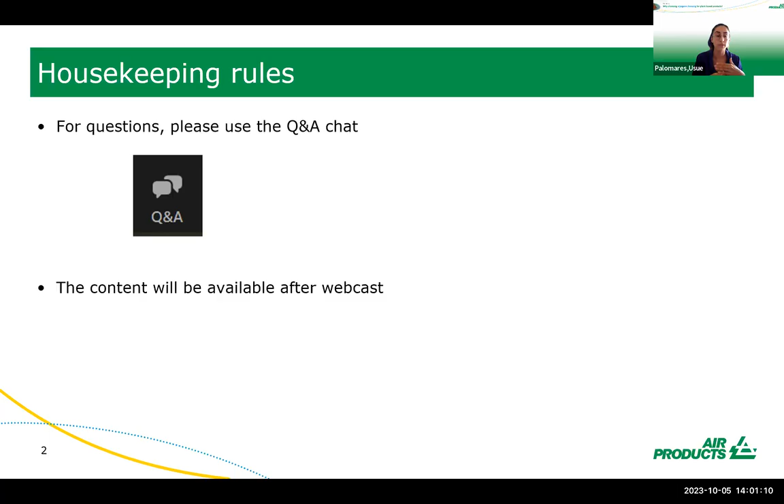In today's webinar, Ann Callens, Food Segment Manager of Air Products Europe, and Jon Trembley, Technology Manager Cryogenic Applications at Air Products Europe, will present the plant-based event.

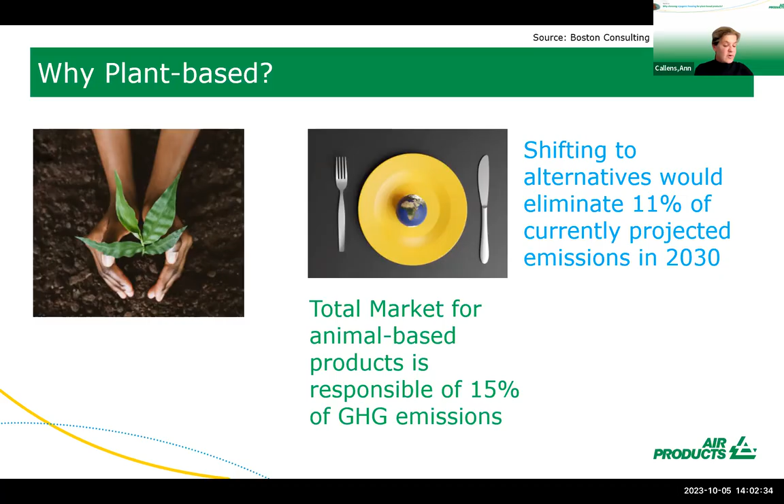So let's take a step back and ask ourselves the question, why is the market shifting to plant-based products? And the answer is very simple. What we eat has become critical in how we combat the climate crisis today. So on what we eat, we see that consumers are on board and they want healthier foods, for themselves and for the planet.

More than 30% of consumers would fully shift their diets to alternative proteins if doing so would have a major positive impact on climate. But there are still certain barriers for manufacturers to tackle. Four of these barriers are listed here on the slide. It's really offering plant-based products with taste and texture that satisfies the consumers.

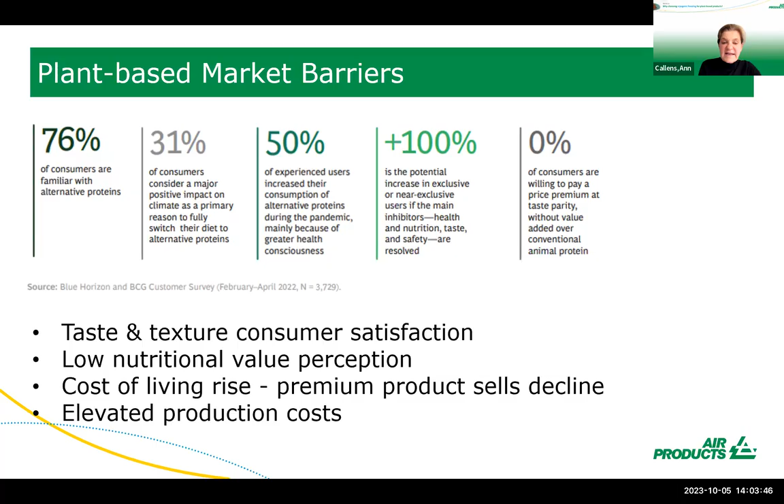Plant-based protein products sometimes still have a low nutritional value perception. How to tackle this? And then there is the cost of living rise, premium products. And yeah, they are expensive. And we see that some of these product sales decline in the market. And then there still are elevated production costs.

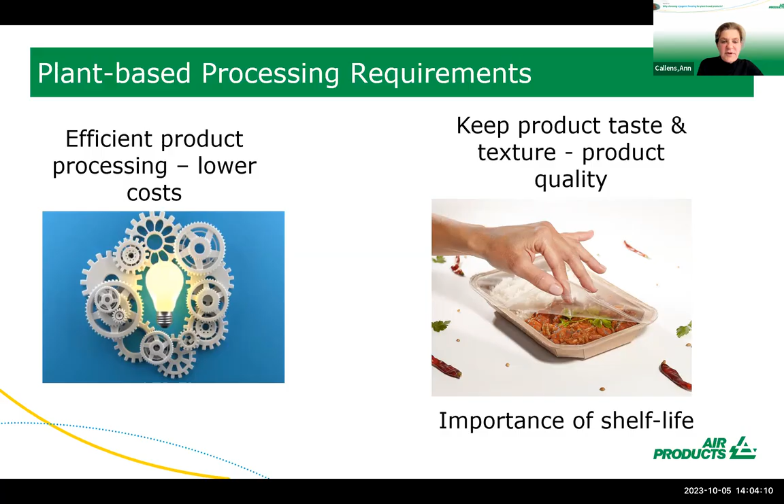So what do processors need to do now to tackle this? One of the key things is efficient product processing, going to lower costs. Secondly, it's keeping the product taste, texture, and quality, and therefore the importance of shelf life comes to the table. Talking about shelf life, that means plant-based products need to be preserved as long as possible. And what is shelf life?

It's stopping the growth of food poisoning microorganisms. It's slowing down the deterioration of nutrients. It's maintaining texture, taste, and aroma. And it's reducing the waste and increasing convenience.

Okay, so food preservation takes a key role in the food supply chain, and it has one of the biggest impacts on consumers' experience. Today, we're going to talk about two food preservation methods: cryogenic freezing and modified atmosphere packaging.

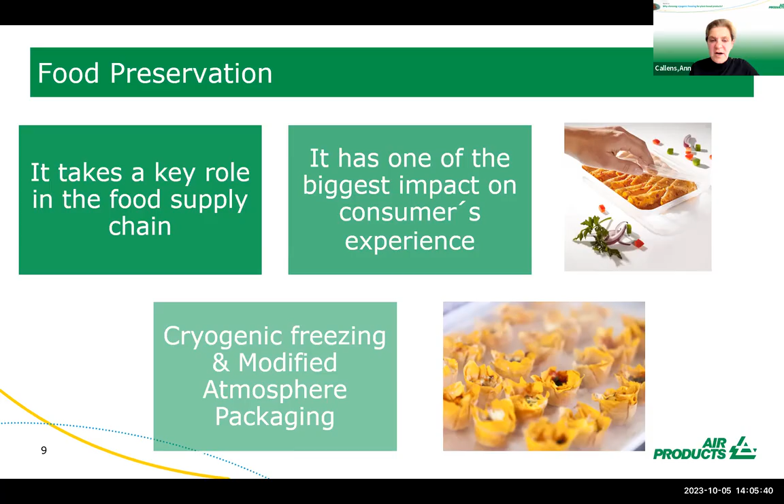Cryogenic freezing and modified atmosphere packaging are two technologies that exist amongst many others, but today it's mainly about freezing. We have been doing a lot of work on modified atmosphere packaging as well with plant-based products. But Jon will take you through the cryogenic freezing aspects of plant-based products and explain all the work we have done so far. So Jon, can I hand over to you now?

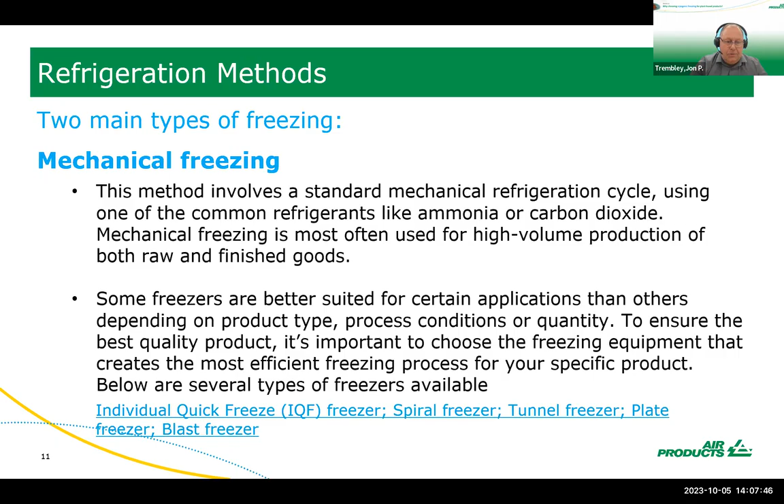Now, if I talk about cryogenic freezing, this is a method that involves spraying or direct contact of a cryogenic material on top of the food, typically liquid nitrogen or liquid carbon dioxide. The product is frozen almost instantly while the refrigerant is then vented off to atmosphere. Cryogenic freezing equipment generally requires a lower upfront capital cost than mechanical freezing for the same capacity and requirements.

And it's often used for products which are difficult to freeze or require individually quick frozen, individual samples like wings, etc. But lots of other bulk package items are also used where it's important to maintain them in individual pieces. It's also sometimes chosen where space is limited because you can do a very large amount of refrigeration in a small footprint, which can mean lower cost in regard to the overall product cost, and also allows you to get into the marketplace very quickly. So that's a very high level summary of the two freezing methods, mechanical and cryogenic.

Just move the slides on.

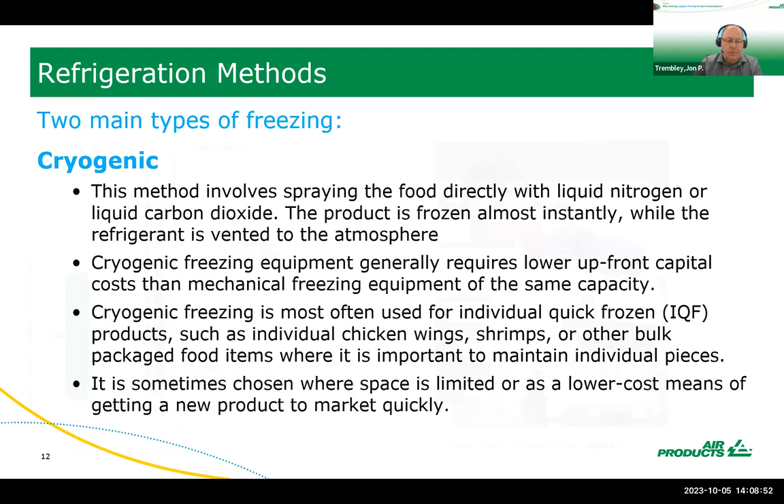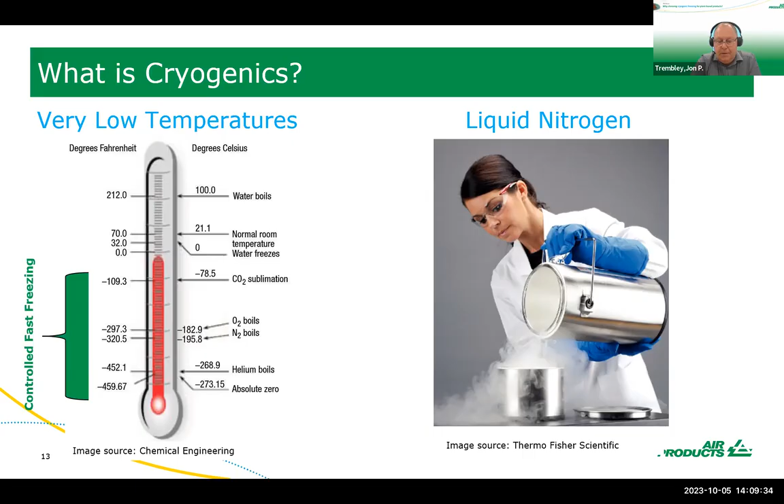You can see on the scale here from water boiling right down to absolute zero. And on the right-hand side, there's a little photo of somebody using liquid nitrogen to give you a feel for what that product is. It's a cryogenic liquid, so there's certain safety requirements that need to be considered when you're using it.

So in relation to the topic of today, what does controlled fast freezing actually mean? A critical design parameter in any freezing process is the freezing rate itself. It's what we call the product freezing rate, which relates to the actual time that the product is frozen, and the critical part of that is when the product changes state through the process. So the freezing rate is the rate of change in the temperature during the freezing process. It's normally defined as degrees C per hour, or in terms of depth penetration of the product, centimeters per hour. And I'll talk a little bit about that later.

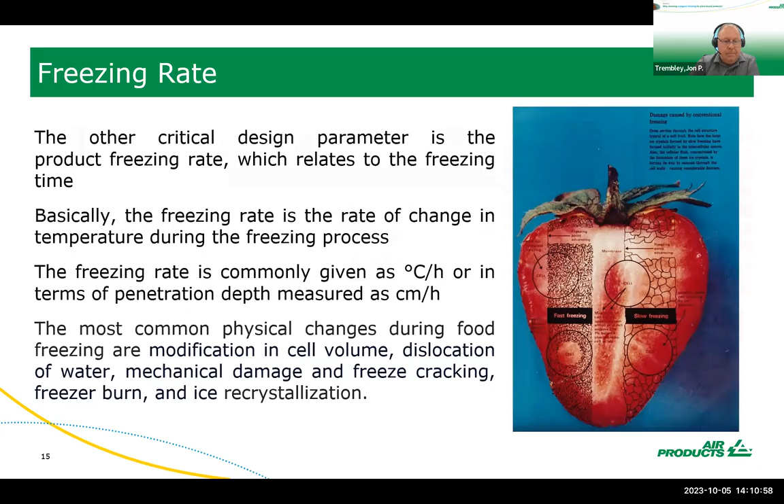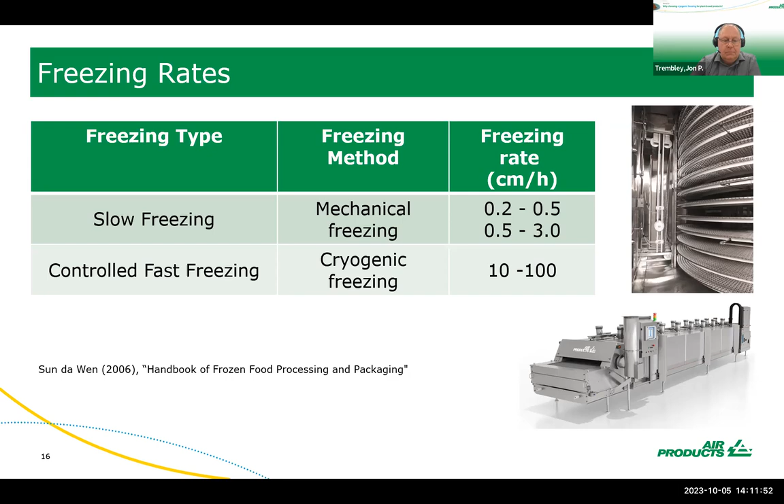And as you can see in a cryogenic freezer, where there's a picture in the bottom right hand corner there, that's controllable. So the heat transfer rate within the freezer can be adjusted according to the product. And typically the minimum can be anything from 10, but in certain conditions, you can get right up to 100 centimeters per hour. So a significant difference between the two freezing processes. Let's move on to the next slide.

The time that the product is in that freezing zone has the impact on the final product quality. Typically, it's between 0 degrees and -5. We call it the critical freezing zone. And that's where most of the cellular freezing damage can occur. And just to give you some examples, if you stick a bit of food in your freezer at home, that might take 19 hours or more to freeze.

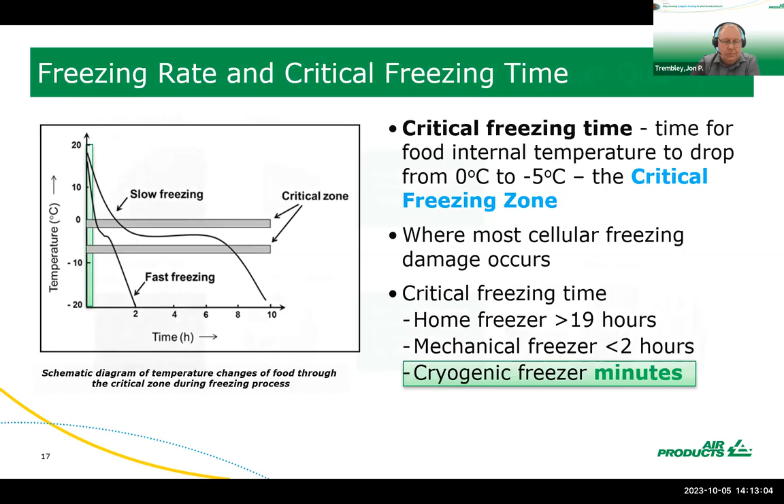Whereas with the slow freezing rate, there's a lot more ice growth, larger ice crystal size, even recrystallization of the ice through the process. That leads to fractures within the internal structure. More cellular damage leads to poorer texture, loss of nutrients, loss of pigments, color change on thawing.

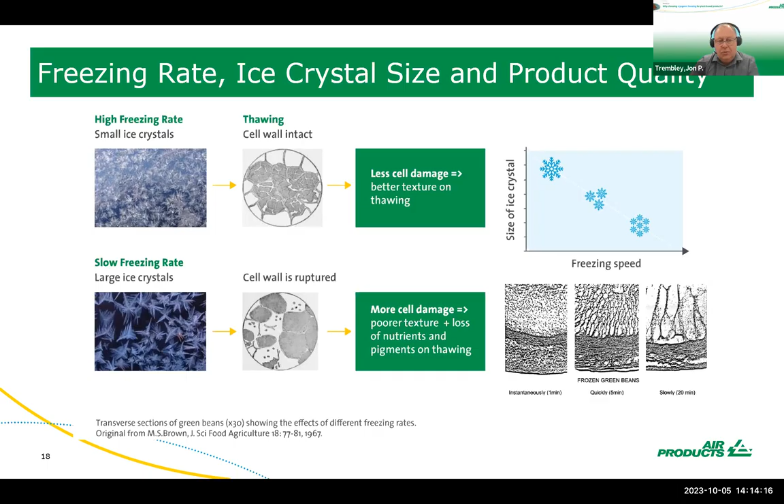And the picture on the right-hand corner gives an idea of what those kinds of structures can be within a product. And the top right chart shows freezing speed: slow speed, large ice crystals; the faster the speed, the smaller the ice crystal formation. So it gives a representation of what can occur. So these are all things to consider in your freezing process.

So what's the other impact associated with that? This is weight loss that can occur during freezing. During the freezing process, products will suffer dehydration due to the surface conditions, and that dehydration can be significant depending on the type of freezing process used, even up to something like 10% in some cases.

Cryogenic freezing generally has a significant impact on the reduction of dehydration because of the high freezing rate that you achieve and the rapid surface conditions compared to mechanical freezing, and the level of dehydration is typically a lot lower when the product is exposed to nitrogen, CO2, or very cold refrigerated air.

Mechanical freezing has a different kind of heat transfer mechanism. It's more of an isothermal process, so there isn't a gradient in temperature during the cycle of the product, and that has a significant impact on the dehydration of certain foods.

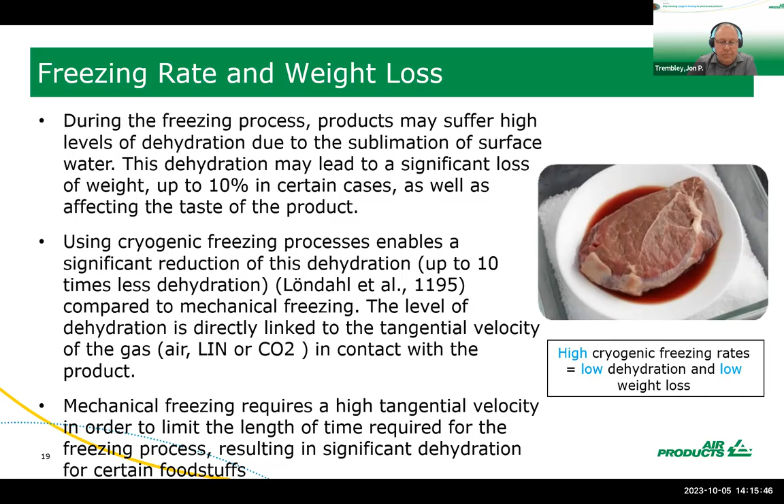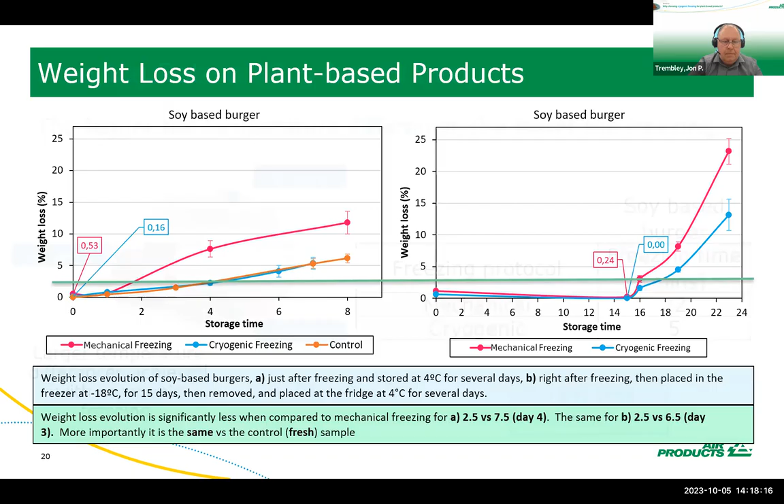So just to reiterate, the bigger the temperature difference between the refrigerant and the product, the faster the freezing time. So if you had air at -20 in a typical mechanical blast freezer, or CO2 in a CO2 freezer at -78, and liquid nitrogen at -196, you have a huge temperature difference, and that affects the freezing time. For the soy-based burgers in the previous slides, we've seen freezing times of around 5 minutes for cryogenics versus 22 minutes for mechanical. So almost 75% less freezing time.

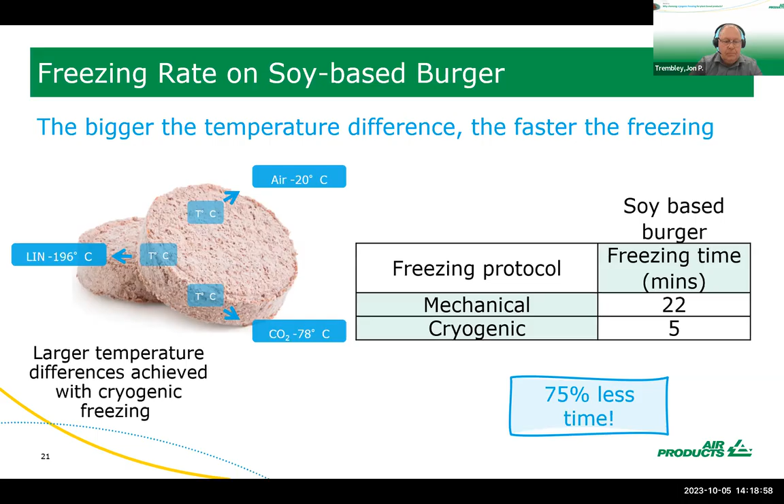So in summary, what is controlled fast freezing? Less tissue damage during freezing, improved yield and quality in terms of flavor, texture, and appearance. And here are a couple of SEM photos we took of the samples from our lab tests. On the left-hand side, the mechanical structure; on the right-hand side, the cryogenic structure. You can clearly see the difference in ice formation within the product. These frozen samples were vacuum dried to remove the water, and then the dry product was imaged by SEM. It's a nice way of seeing the structural differences.

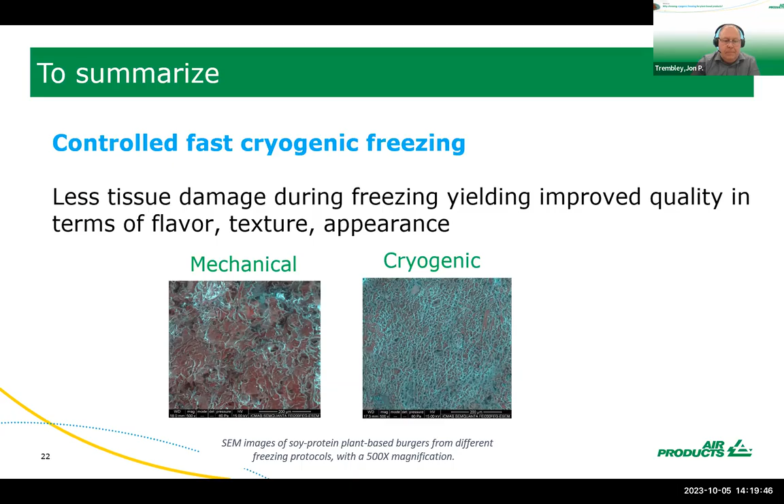And I think that concludes my summary on cryogenic freezing. So I'm going to hand it back to you, Asui, is it?

Yeah, thanks, Jon. So what you have been showing is that cryogenic freezing of these soy burgers gave a product that was less damaged after freezing. The SEM pictures showed a much better texture for the cryogenically frozen products. And secondly, the weight loss you presented for these soy burgers was also quite lower with the cryogenically frozen burgers.

Just a quick question before I go into this bit here. Have you seen this for all your trials? Yep. Actually, that's just one example of one type of plant-based product that we tried.

We've done other samples, and the trends are the same. Great. Okay. So in the beginning of the webinar, we were saying consumers are really choosing plant-based products because they are convinced that changing their diet, they will contribute to a better world.

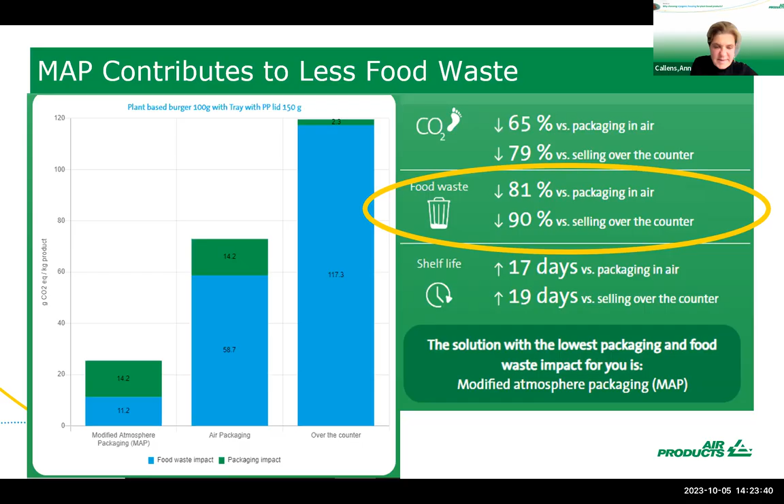The blue part of the chart is the impact of the food, and the green part is the impact of the plastic. So what this shows is that by packing food, a plant-based burger, with MAP, you can really reduce the impact on the climate. So that was for MAP.

The other example I wanted to present is about cryogenic freezing. Cryogenic freezing definitely contributes to less food waste as well. As Jon was explaining in his presentation, with cryogenic freezing you have less losses, less weight losses. You have seen the picture with the meat. That was really a great example, Jon. So with cryogenic freezing, you can reduce the impact of food waste quite extensively as well.

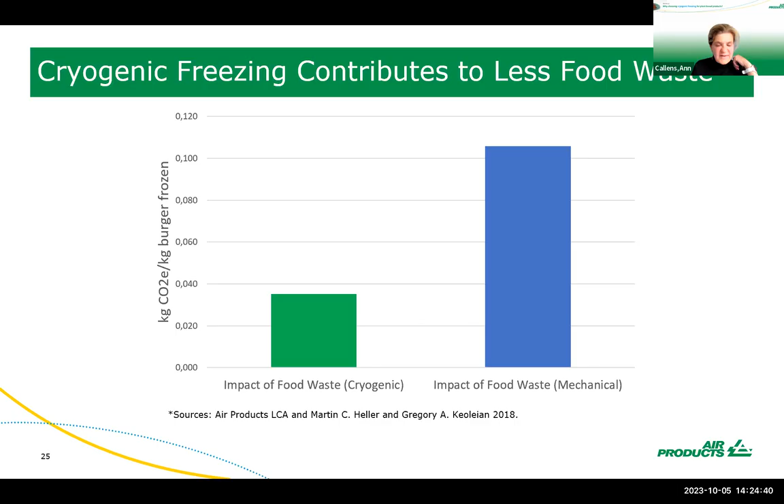So here you see an example of a plant-based burger that has been frozen with cryogenics, and the other one mechanically, and the impact of the food waste with the cryogenic one is far lower. Voila, so that was it. I wanted to show you these examples, and I think, Usui, we are at the end of this session now.